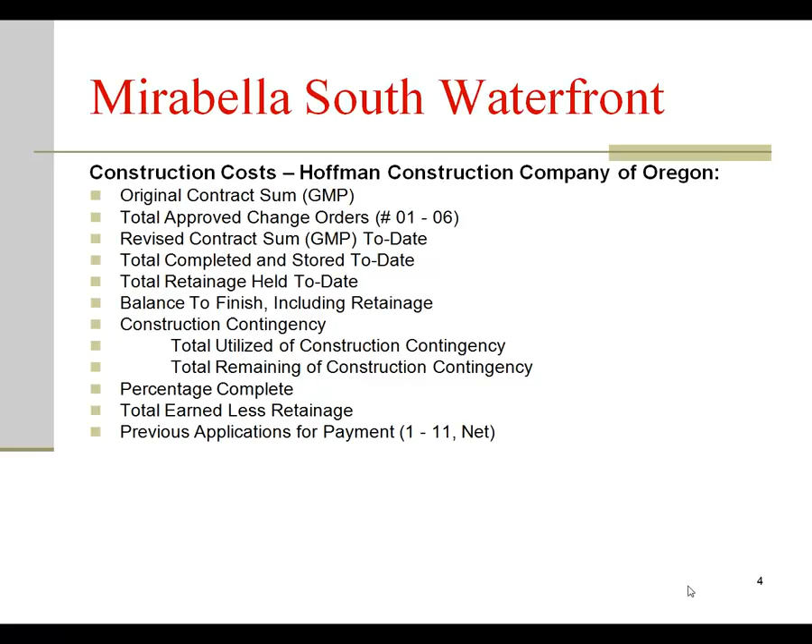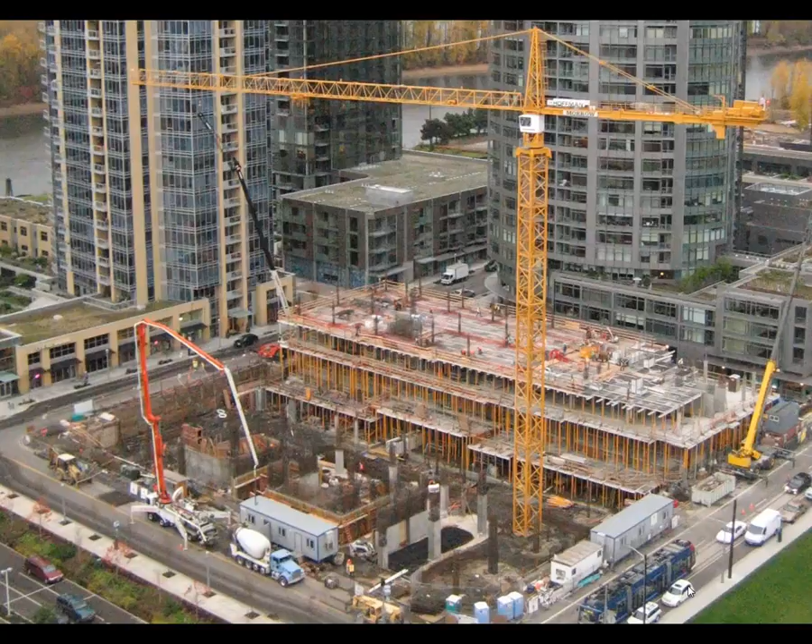This is the hole in the ground from whence the Mirabella Tower will rise. Here you see it on its way up. And here you see the winter before last when we were hit with a bunch of snow in Portland, which

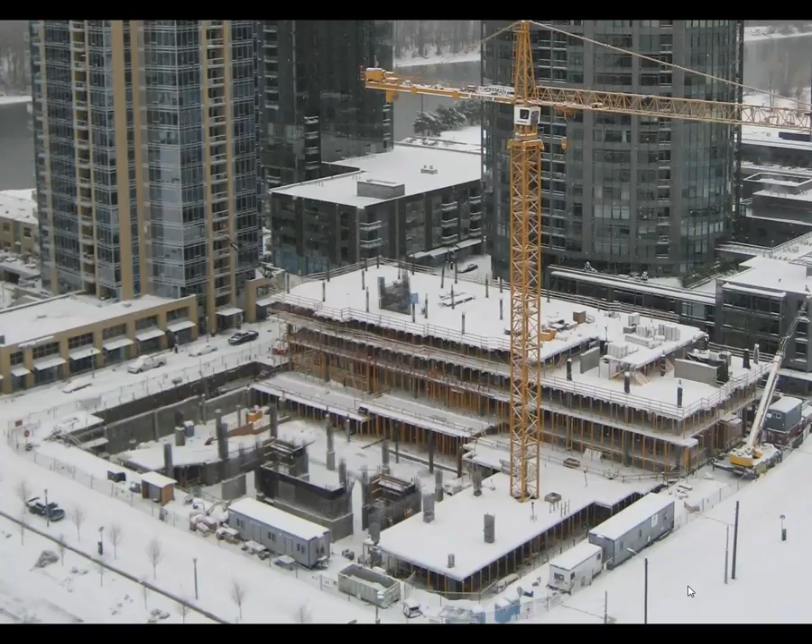caused tremendous delays. This triggered the weather delay clause in the contract, accounting for so many days that could be delayed without penalty because of weather.

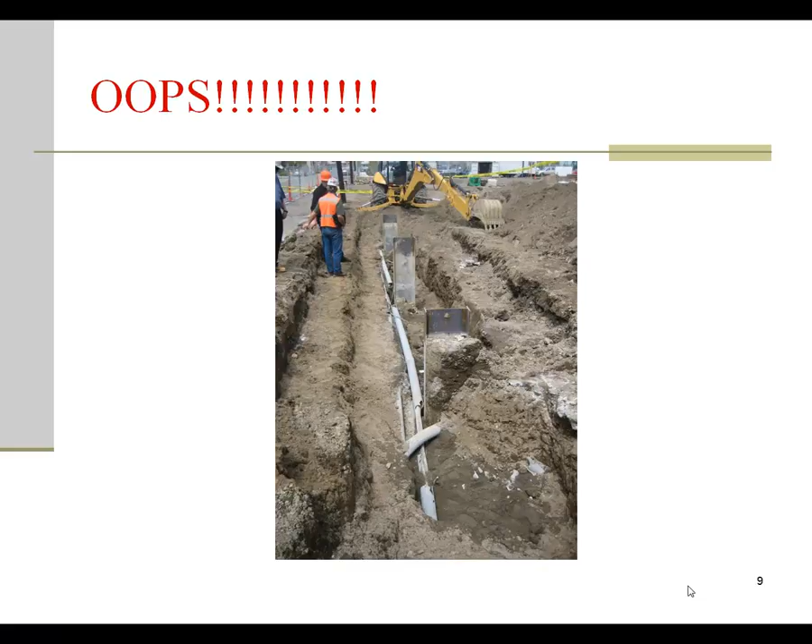There were other factors that occurred, unforeseen conditions that caused renegotiations. Basically, they drilled down and hit a power line that was not accounted for in the city plans. This knocked out power in the whole south waterfront area of Portland, and PRS wasn't very popular during that outage.

Other kinds of factors that are very much dependent upon timing include things such as concrete pours. Here you see a picture of the day that 2,500 cubic yards of concrete was poured to make this slab. As you might imagine, if there's any sort of delay in this process, it causes all sorts of logistical havoc related to getting this project done.

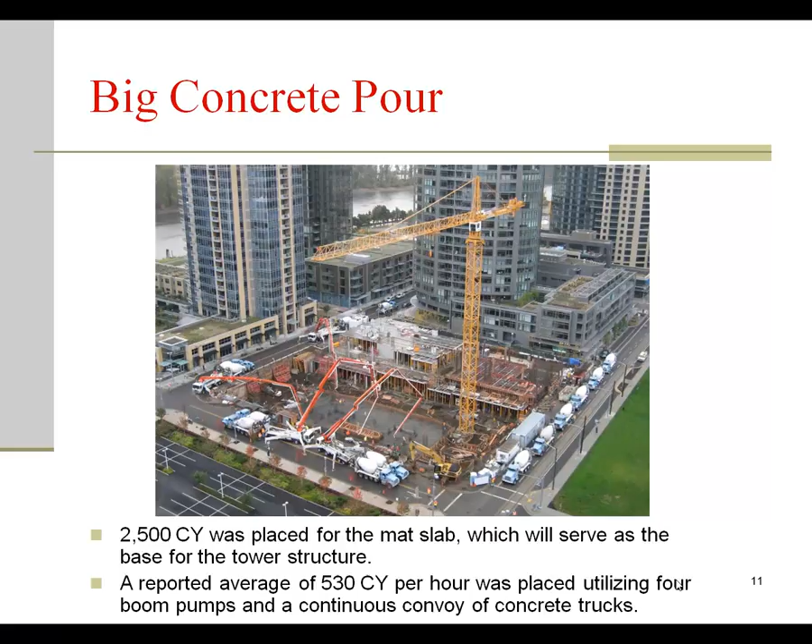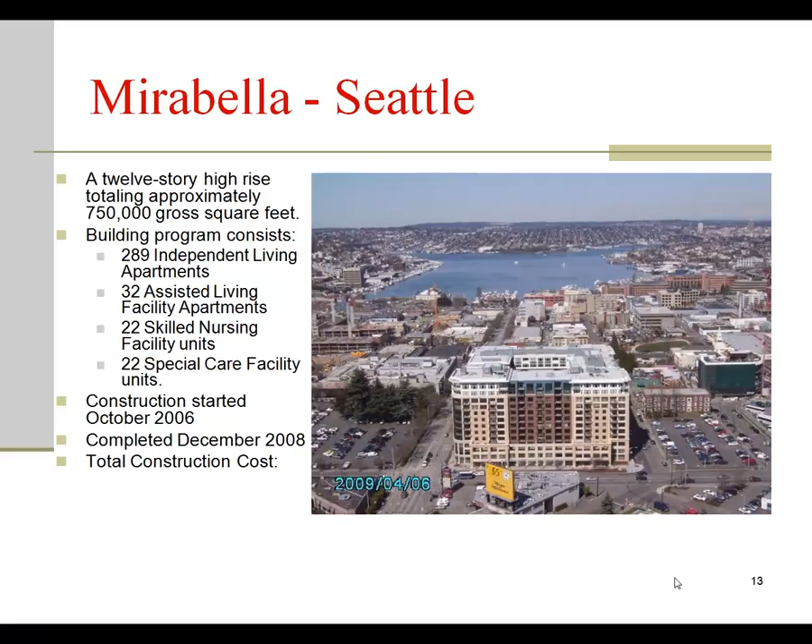The Seattle Mirabella is another example of a project that we've talked about in here. The construction costs on the Seattle project were originally estimated about $149 million. There were 38 change orders that were submitted, and a revised contract amount came in at $157 million.

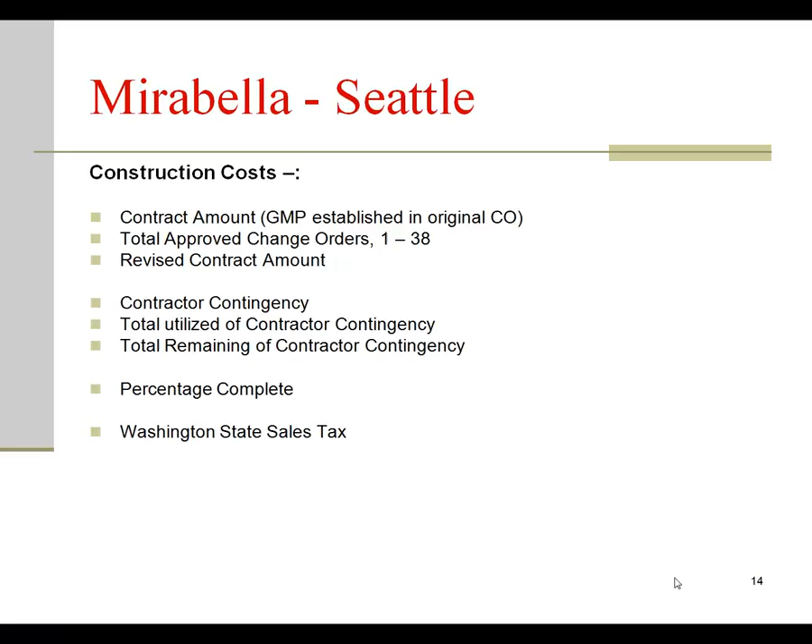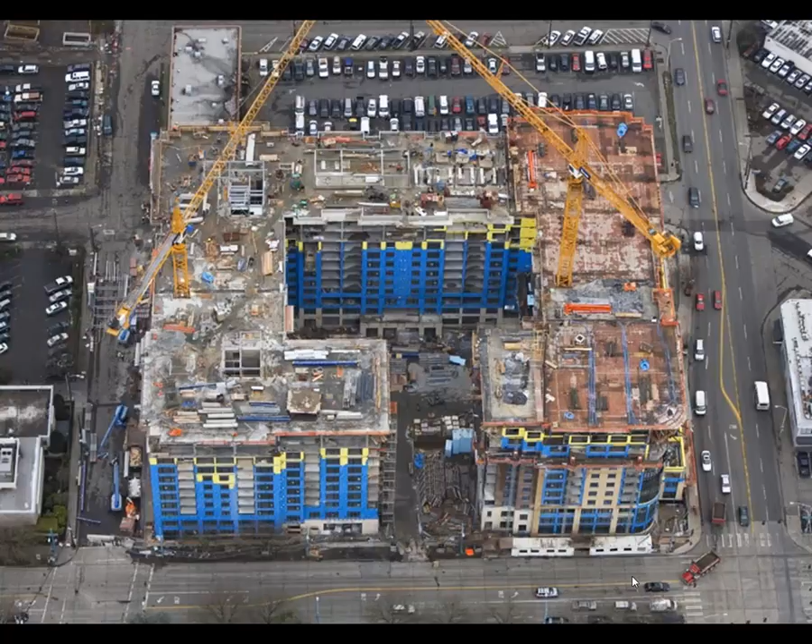This slide here shows construction workers, lots and lots of construction workers, and just gives you an idea of the scope of a project like this. It costs over $500,000 a day during the building process. So as you might imagine, people are pretty concerned about staying on track.

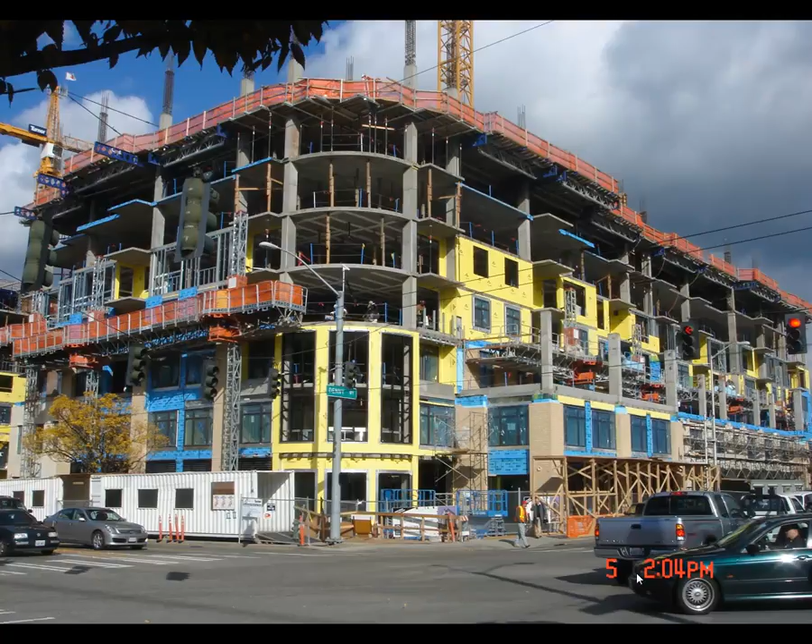So when we say completed, there's a term called substantial completion that's important to understand. Basically, substantial completion means that stage at which owners can come in and occupy the building for the purposes that it was intended to be used for.

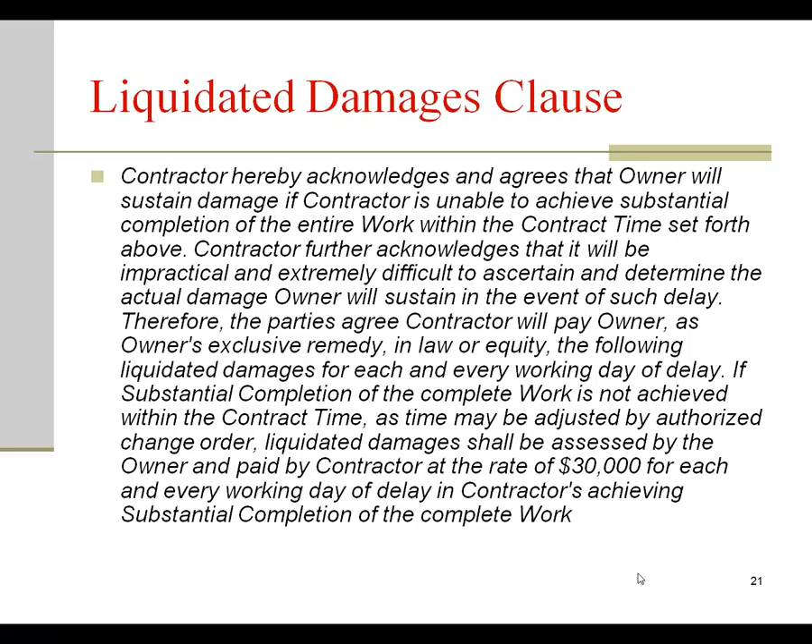If there's a delay in the substantial completion date, there are penalties involved. In this particular case, that penalty was agreed to be $30,000 per day assessed to the contractor if they did not come in on time. On the other side of that coin, if they got the project done early, they would be bonused at $15,000 a day for every day early on the project.

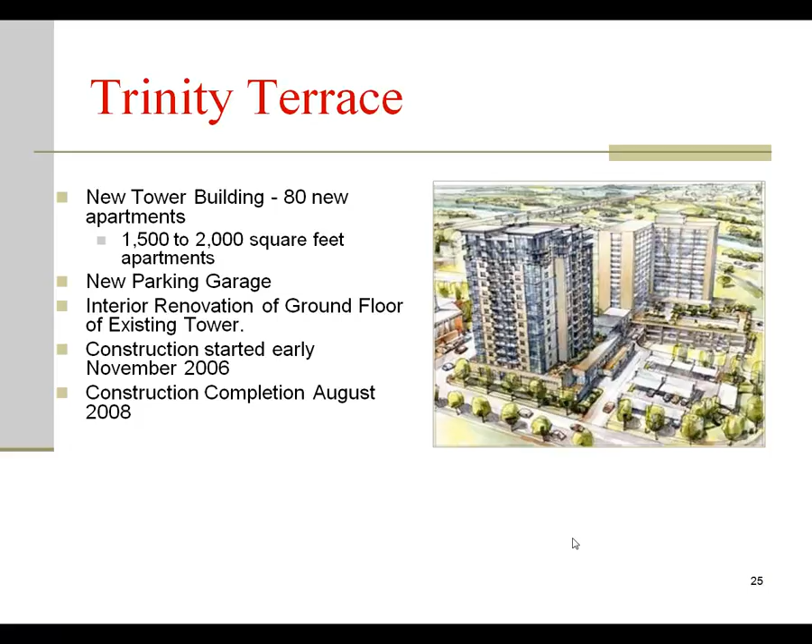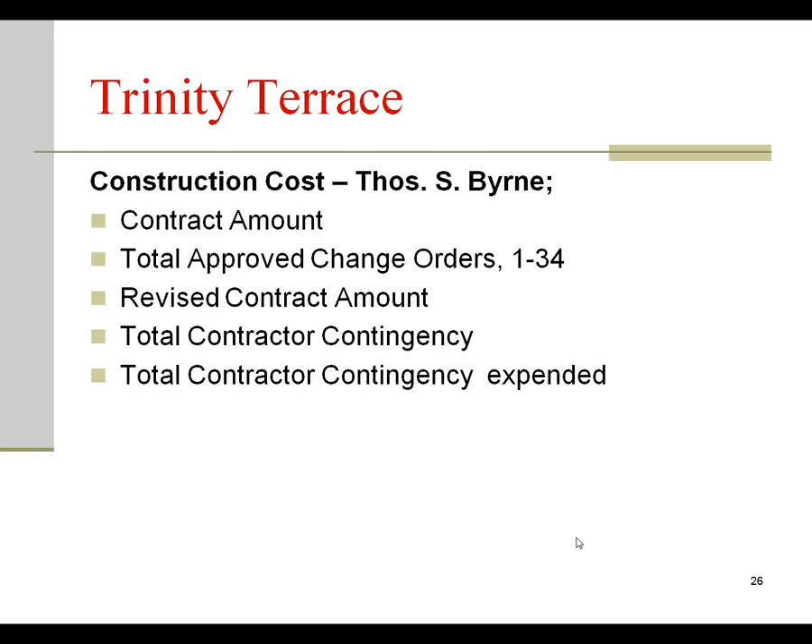A few other projects to touch on real quick. Trinity Terrace down in Texas. Construction costs in that project were estimated at $34 million. There were 34 approved change orders, adding another $6 million to the project for a $40 million addition. And there were about $1 million in contingencies set up at the outset of the project.

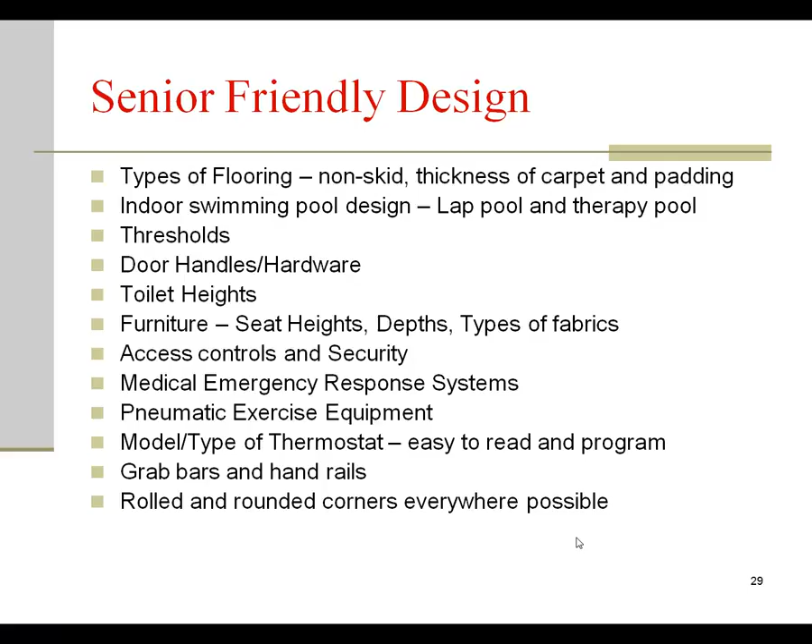So for all our projects, all the PRS projects, senior-friendly design is important, and that means agreeing upon these design features from the outset as part of the GMP. And that includes everything from handles that are easily accessible and doors that make sense for older adults to different kinds of flooring and the other things that you can see in this list.

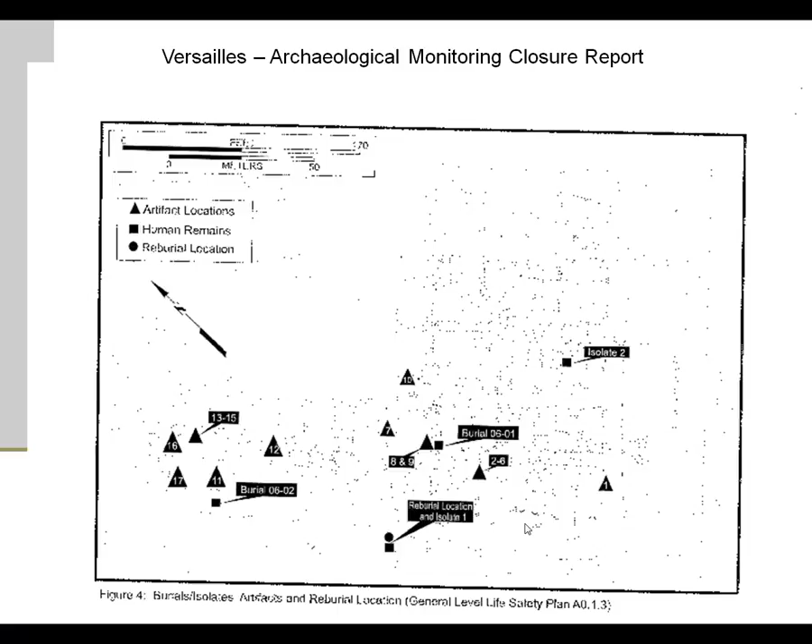And that's basically it for a very quick overview of project management and senior housing.